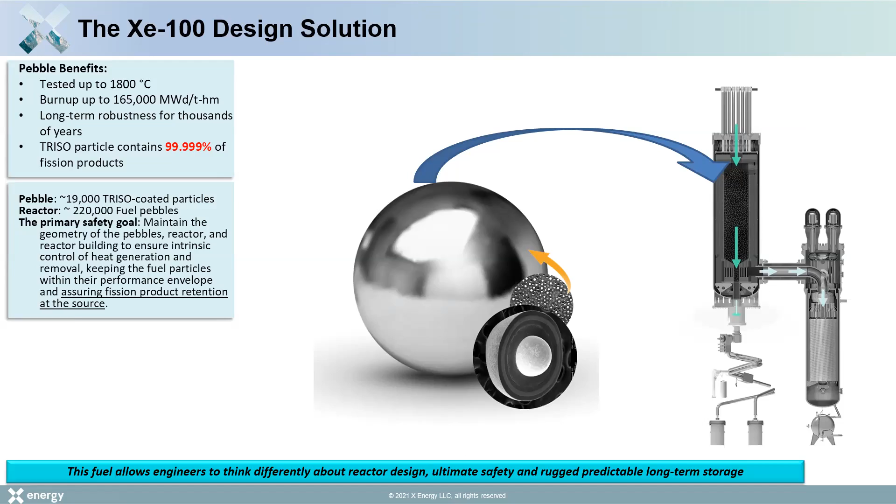So NEI 18-04. X-Energy is committed to utilizing the NEI 18-04 process. It's a risk-informed, performance-based process really focused on non-light water advanced reactors. And the key aspects of the process are that it helps with selecting licensing basis events, classifying structures, systems, and components, and also has a holistic evaluation of defense in depth.

I don't know the full background of everyone on this call, so I will be going into some explanatory details about the NEI 18-04 process just to make sure everyone's on the same page. But I don't consider this an NEI 18-04 tutorial, just enough to at least provide context to the things that we're doing.

As many people are probably aware, with the existing light water fleet, a lot of the accident cases that we look at, design bases, have been built up over the course of years of experience. And we don't necessarily have all that for advanced reactors, nor do we want to live to the same standard. So the 18-04 process allows you to leverage the PRA to build those licensing events and leverage the importance of various SSCs to risk and nuclear safety to classify the structures, systems, and components accordingly.

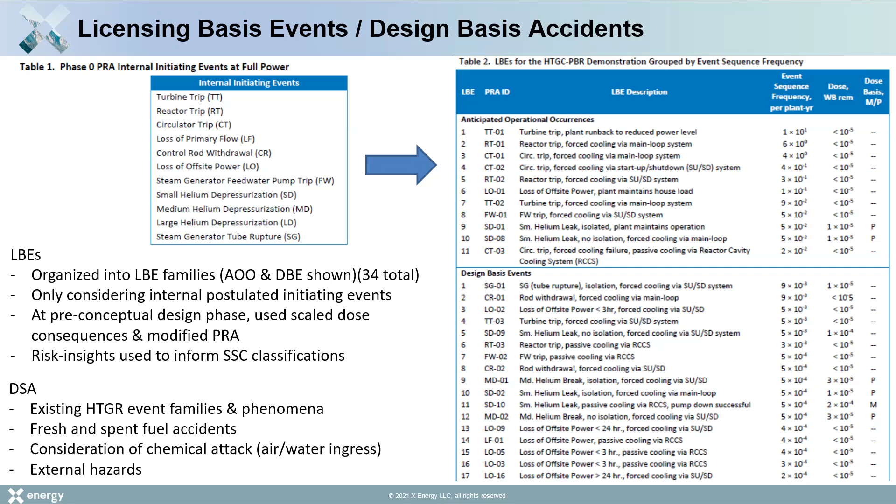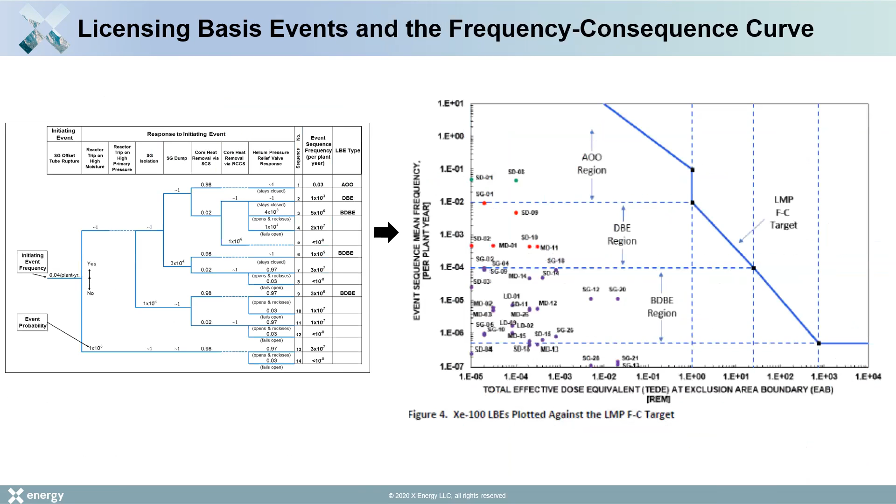What I've said so far is really related to the PRA side of things, so the development of the event sequences and the initiating events. But there's also the dose consequence piece to it. In the initial phase 0 PRA that was developed, we initially just utilized scaled consequences from past HTGR designs to make estimates on the consequences.

But more recently, we've been developing more detailed mechanistic source term evaluations that are Xe-100 specific. X-Energy has developed an integrated suite of codes known as XSTERM to model all of the various phenomena that are important in an HTGR design, and to be able to capture those in the LBE evaluations. Because in the LBEs, we want to treat the physics as best as we possibly can without dealing with conservatisms. And we really need a good mechanistic source term evaluation tool in order to do that.

So to give you an idea of the various physics that the tool was handling, and again, I don't know everyone's background, so I'll briefly go over the key aspects of the HTGR mechanistic source term case. The major safety case in the HTGRs is the TRISO fuel, where most of the fission products are retained inside the kernel and within the silicon carbide layer that acts as the pressure vessel. And as part of the Xe-100 design, even for our worst accidents, we don't expect any significant and potentially any real particle failures to occur in service during an accident scenario.

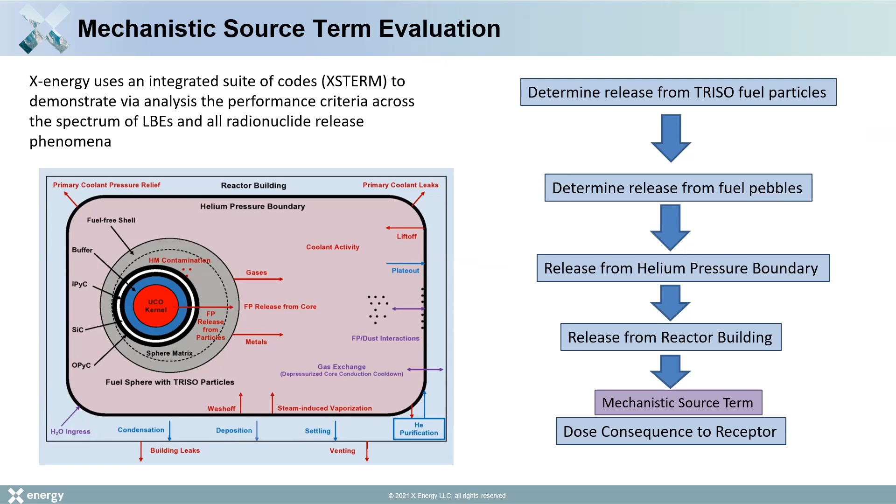Sorry, is there a question? Was that somebody just off mute? I'll keep going. I think we are hoping that people who have questions will use the chat function while you're speaking. Okay.

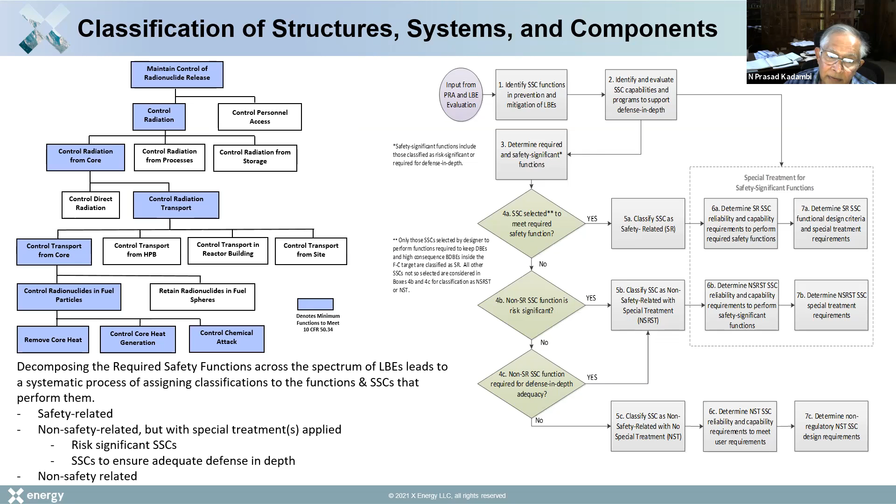Okay, so I'll move on to the next piece of the process, and that's the classification of SSCs. At a high level, NEI 18-04 has 3 different classifications: safety related, non-safety related with special treatment, and non-safety related with no special treatment. And there's a process inside NEI 18-04 for what leads you to those various classifications. The safety related piece is really about those SSCs that are needed in order to meet your required safety functions, described by this tree over here. What are the minimal functions that you need in order to ensure that you meet your offsite dose limits?

For non-safety related with special treatment, which I'll refer to as NSRST, there are really 2 ways that you get there. One is by the SSCs being risk significant, so contributing to one of the quantitative risk metrics to some appreciable fraction. And the other is through SSCs that are necessary to ensure adequate defense in depth. So I'll talk a little bit about the safety related systems first, and then about the process for selecting NSRST.

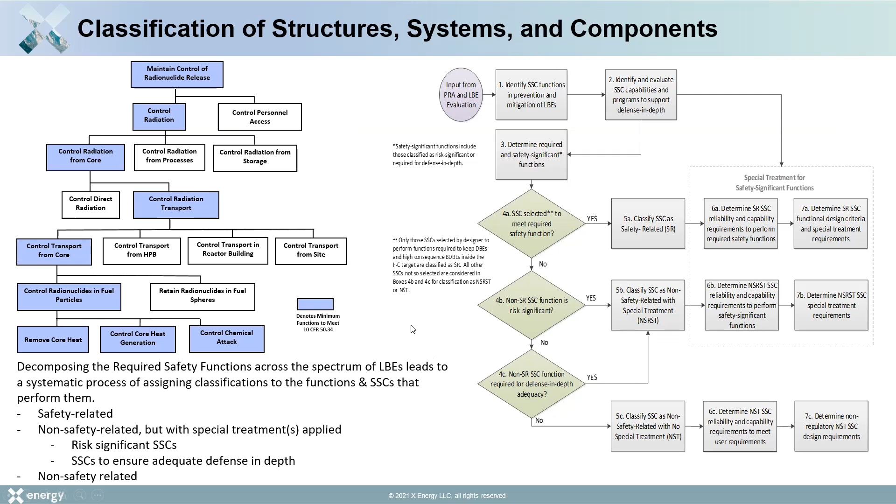And so with respect to the final piece of it, defense in depth, if you look at NEI 18-04, it kind of breaks out these 3 major pieces that I mentioned: selection of licensing basis events, SSC classification, and evaluation of defense in depth adequacy. It looks like 3 processes. It's not 3 separate processes. They're clearly intertwined. But one of the things that we've learned going through this is that, as an organization, you have to build a process. And I see these various pieces as tools that you have to put together in the right way in order to work for your design.

And so we spend a lot of our time talking about defense in depth because, again, I think the safety related piece is fairly clear. I think we have a good case for that. In NSRST, we're not identifying risk significant SSCs.

And so really all the conversation is about defense in depth. And so, I would say our defense in depth adequacy and evaluation is really quite baked in with our SSC classification process, because those are the major questions that we're asking all the time. So we are looking at defense in depth on a regular basis, making sure that as we're making various classifications, our overall defense in depth posture makes sense.

And so in the end, we'll probably run through the whole process to make sure at the end that the posture is what we want it to be. But I would say it's something that we've found we're heavily integrating as part of the defense and the SSC classification process along the way.

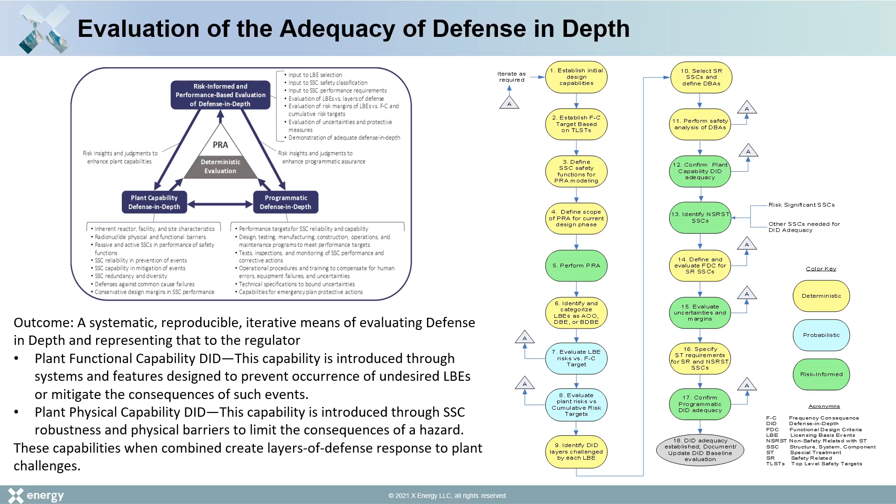And the way that we have sort of proceduralized it, or we haven't exactly proceduralized it because we produce guidance, is the IDPP charter that identifies the basic process X-Energy is following to implement NEI 18-04, and then various guidelines to make sure that we implement it all in a consistent way. So that's going through the various pieces of the process, and some targeted things that we've learned along the way.

Now I want to close off talking about some major insights and lessons learned. So one is, I think all of us feel that the NEI 18-04 process is a logically consistent framework to help establish all the pieces needed to make the licensing case. And one interesting story: X-Energy is involved in projects in Canada, and one of our Canadian counterparts, when first getting involved with the project, looked at the NEI 18-04 process and the Canadian licensing structure and said, yep, we have to do all of that, and this is put together in a framework that makes complete sense.

So when someone from a different licensing regime and different background came and looked at it, they said this is something that makes a lot of sense. And even when we look at the Canadian licensing structure, we expect it's something that can be adapted or readily used.

And as I mentioned before, the process, especially if you're building off of past designs and leveraging design insights from past designs, helped us at the beginning getting risk insights into the design evolution. As long as you can maintain the consistency of the PRA with the design and keep things updated, we found we could use it at all stages in design to draw appropriate insights. The performance-based framework also allows us to readily implement other risk-informed initiatives.

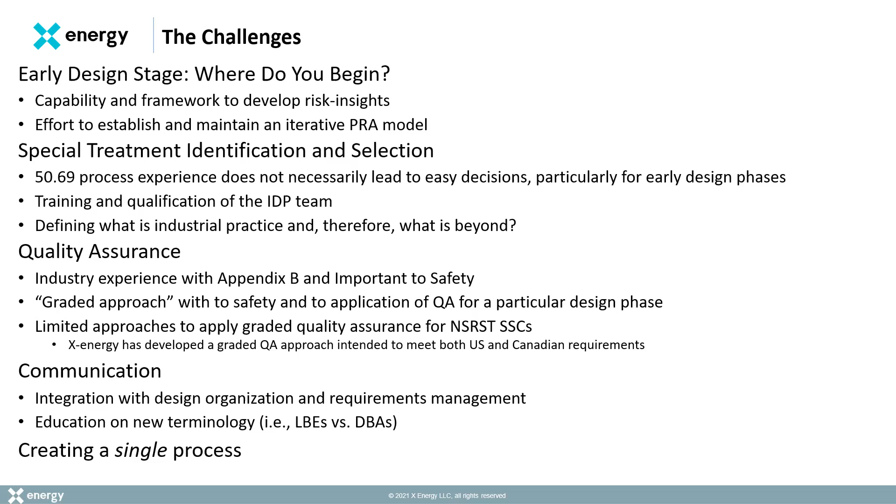And then one thing to close off on is the use of NEI 21-07 for a SAR format. That's something we haven't committed to, but we're actively looking into it since its release for the preparation of our own SARs.

So with that, I thank you for your time and attention, and I will take any questions that you may have. Okay, there's a question on the chat from Bob Martin. Yes. Can you read that, Kyle, or shall I?

Yes, I got it. So you stated that you only considered internal events. What have you done to address external events? So I'll say that first. So we have since started to incorporate external events in the PRA that was noted at the time. External events were not included, although I'd say we've been implicitly including them, at least in our thought process all along the way, because we know we're going to have to, even though it hasn't formally gotten into all aspects